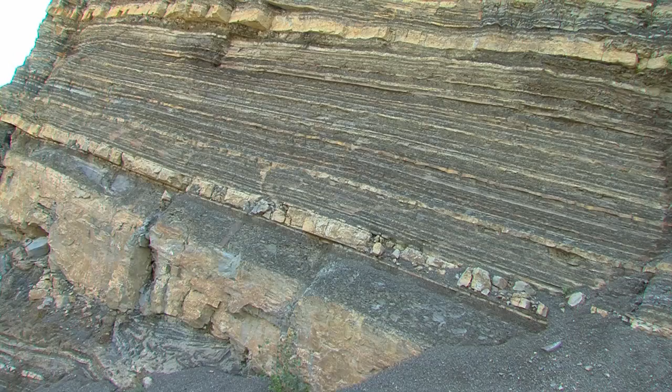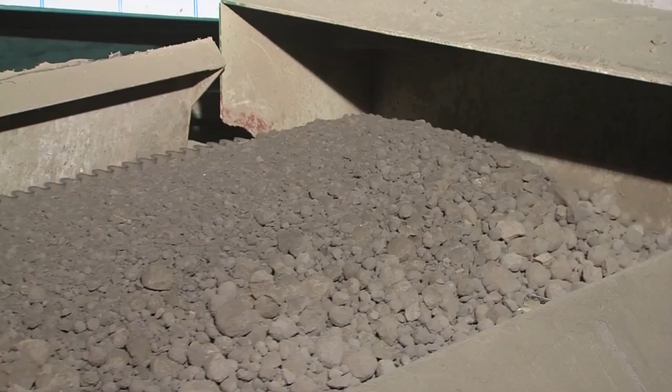Minerals are building our planet and are part of our lives. They have an important role in many industries, also in the production of cement, which is represented by the company Salonit Anhovo. We meet the minerals all the way from exploitation of raw material to cement and at the end to concrete. Let's explore minerals in the cement industry.

The cement plant Salonit Anhovo and its quarry are located in the central part of Soča Valley, in the municipality of Kanal ob Soči between settlements Deskle and Kanal. The whole mighty complex extends on both sides of River Soča. Fabrika, as it is called by the locals, for almost 100 years gives bread to the local residents and others in its near and farther surroundings.

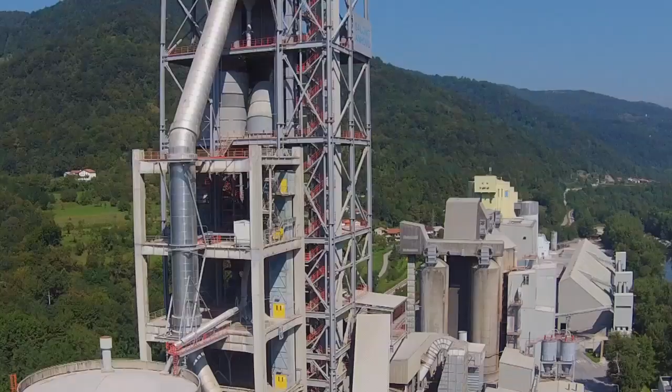The geographic location of the quarry, from where the main raw materials for cement production are supplied, certainly contributed to placing the cement plant right into this place. The area of Anhovo quarries consists of Rodeš, Perung, Lastiunica and Deskle quarries. In geological sense, they belong to the External Dinarides, and geographically to the western border of Trnovo forest.

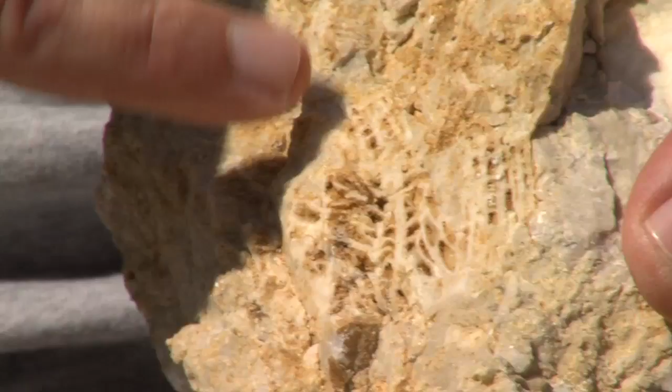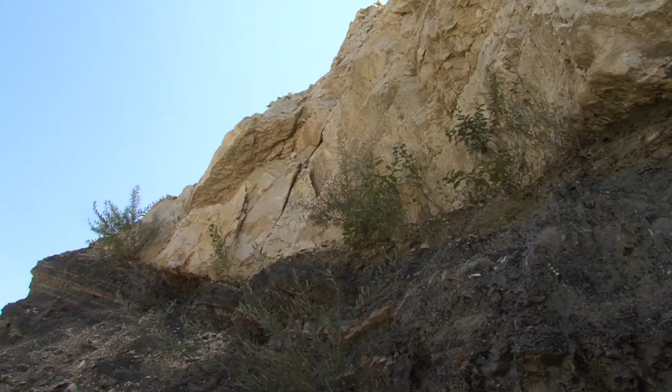Based on the geological research results, we can claim that the area of today's central Soča Valley was under the sea in the Upper Cretaceous, Paleocene and Lower Eocene. Tectonic movements and sedimentological conditions caused the occurrence of underwater landslides, known as turbidites, and debris flows. Seabed sediments, which were not yet completely petrified, have been eroded. After, slipping layers deposited in accordance with the gravity law, first larger, then medium, and finally the finest particles.

Thus were formed the cyclothems, which represent a sequence of rocks and were created as a result of underwater gravity processes. Layers which were deposited within cyclothems in the area of Anhovo quarries have quite similar composition. They differ only in the share of individual rock layers. Each cyclothem consists of marly calcareous breccias, coarse-grained carbonate sandstones, medium to fine-grained sandstones, marly limestones and marl stones.

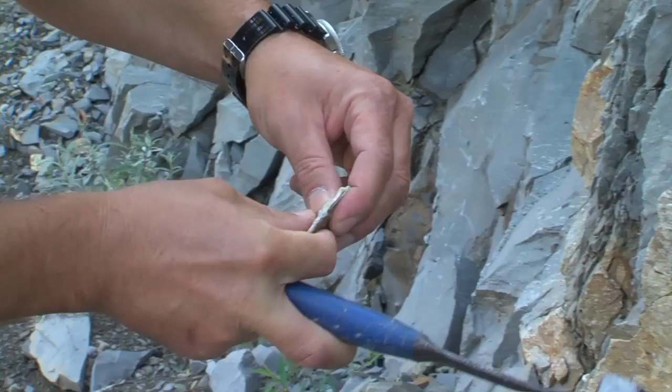The flysch sequences at the top of the marl stones consist of fine-grained carbonate sandstones which alternate with mudstones, claystones and siltstones.

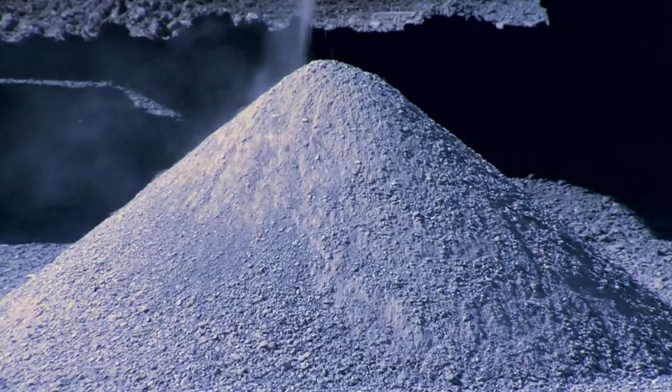The formation of the first Rodeš quarry is closely connected with the discovery of Ivan Nibrant, the master mason from Anhovo. In 1904, while he was cooking lime, he noticed an unknown grey powder, which later turned out to be an excellent raw material for clinker burning. Based on Nibrant's discovery, Emil Stock, the entrepreneur from Trieste, built in 1921 the cement plant in Anhovo. With the beginning of operation, the use of raw materials from Rodeš quarry, which is located on the left bank of Soča River, was also started.

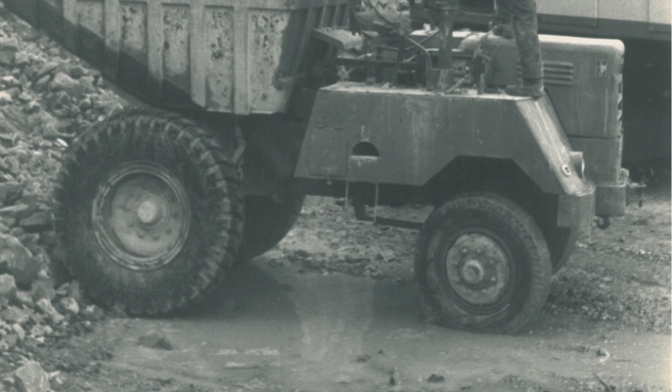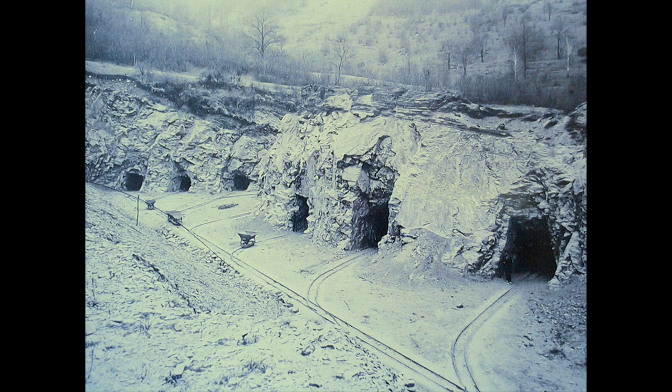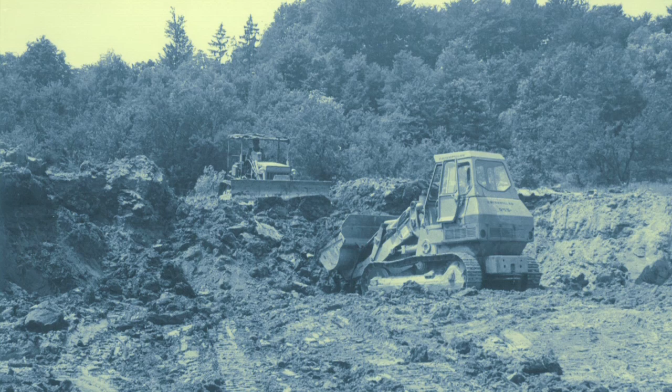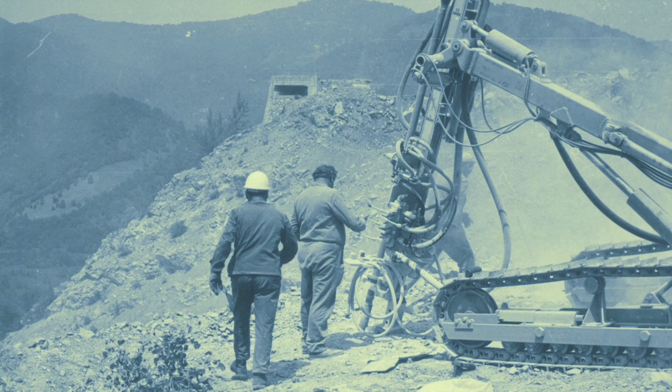Initially, they were extracting only marl stone, which contains about 77% of calcium carbonate. Its chemical composition was optimal for the cement clinker production. At the beginning, the natural marl, as it was called, was obtained through open-cast mining. Gradually, when the layers of marl stone on the surface were exhausted, the mining operations were redirected to underground extraction of raw material. The difficult working conditions and higher costs of underground extraction have stimulated the research work and the search for new layers of marl stone on the surface. This research led to the opening of new quarries, Deskle and Lastiunica.

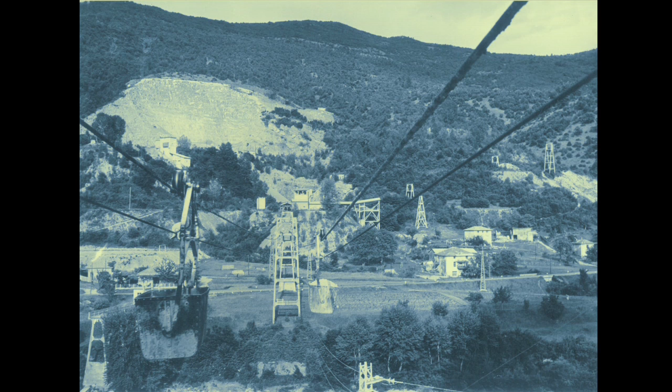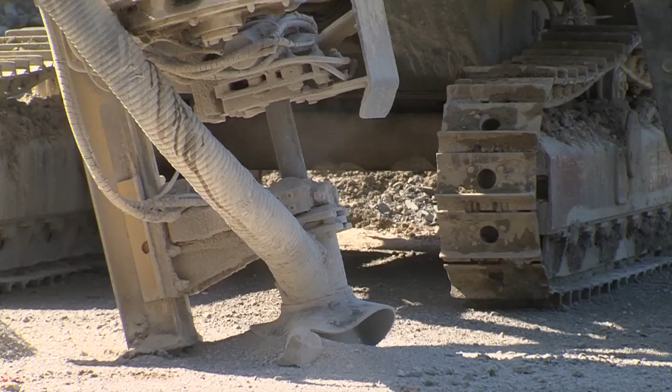The acquired raw material was in the quarry transported manually with transport carts or locomotive. The transportation processes continued with a cableway until the year 1973, which was held above the Soča River to the other part, where the cement plant was operating. Later, when quantities of natural marl were no longer sufficient for the cement production needs, the extraction, in order to get the right composition, was redirected to rocks with different contents of calcium carbonate, approximately from 70 to 80%, which were properly mixed before the clinker burning. Today, the mineral extraction runs through drilling and mining works in Rodeš and Perung quarries.

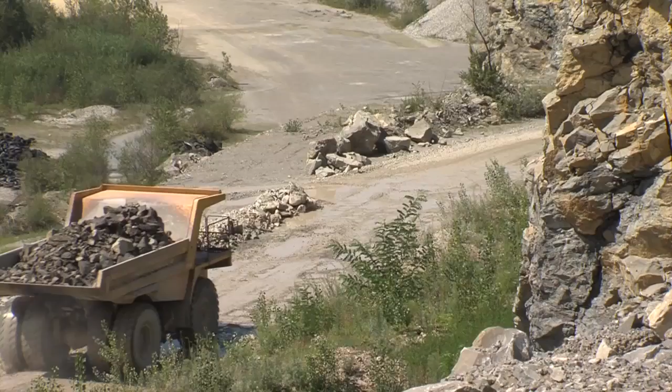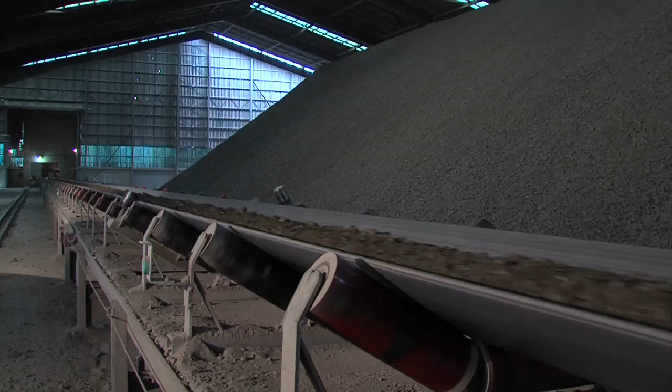From these quarries, the material is transported with dumpers, which have a load capacity of 50 tons, to the primary crusher. Crushed material is then transported with conveyor belts into the pre-homogenization hall. The pre-homogenization process is carried out with a longitudinal layering of the raw material mixture on a pile of 100 meters length, which consists of approximately 600 layers of materials with different compositions.

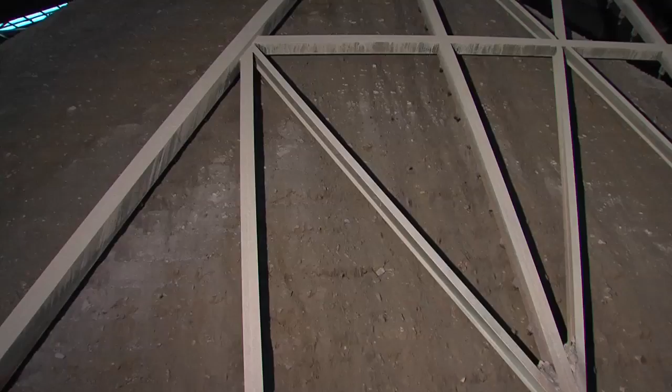Prepared material is taken from a pile with transverse withdrawing, which is carried out transverse to the pile's longest axis, in order to ensure the homogeneity of the raw material mixture. There are always two piles in the raw material hall. One is in preparation, and another is in use.

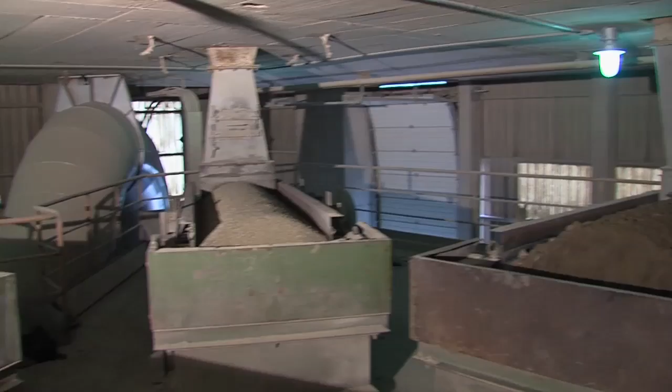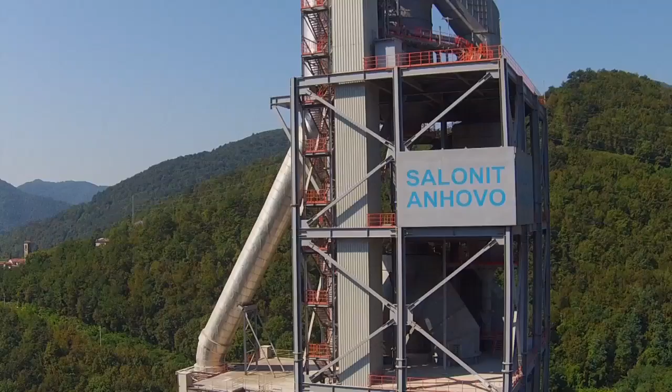Raw material mixture is transported to the other bank of the river Soča to the raw mills, where it is ground together with additives into raw meal. The latter is stored in silos, where the last phase of homogenization is carried out. Raw meal enters the clinker burning process at the top of the heat exchanger. Then it goes through a series of 5 cyclones and a calciner, where drying, preheating, and decarbonization, thermal decomposition of carbonate

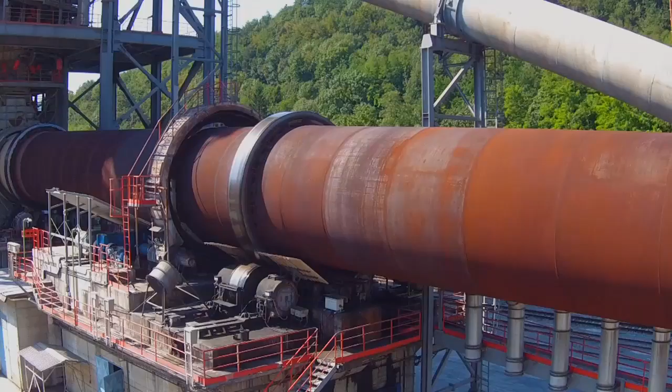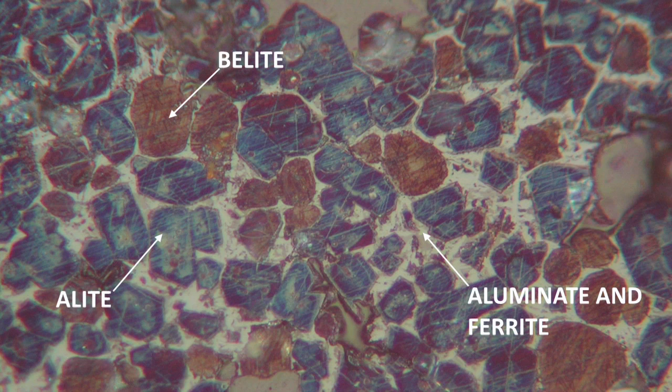minerals are taking place. Hot meal with a temperature of about 900 degrees Celsius enters the kiln in the cooler part. From there it travels toward the warmer part, where it reaches a maximum temperature of 1450 degrees Celsius. During burning, the material is partially melted. This causes complex chemical reactions that lead to the formation of clinker minerals: alite, belite, aluminate, and ferrite. In the final phase, the clinker is quickly cooled in a clinker cooler.

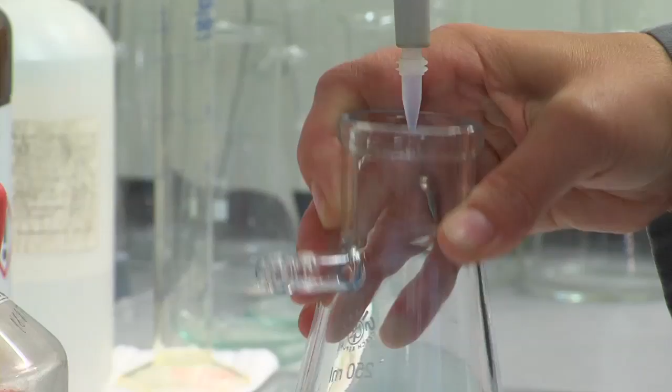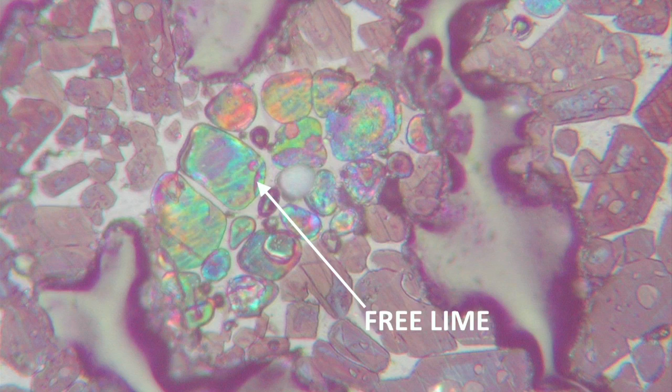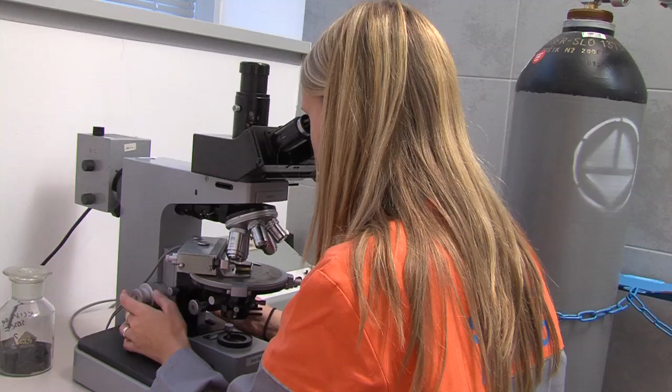The content of free lime, which has to be monitored regularly, is one of the criteria for determining the quality of clinker. Clinker minerals are clearly visible with observation under an optical microscope. The most important clinker mineral, alite, can be identified under the microscope by its blue color and sharp edges. It is very reactive and provides high initial and final strength in hardened cement binder.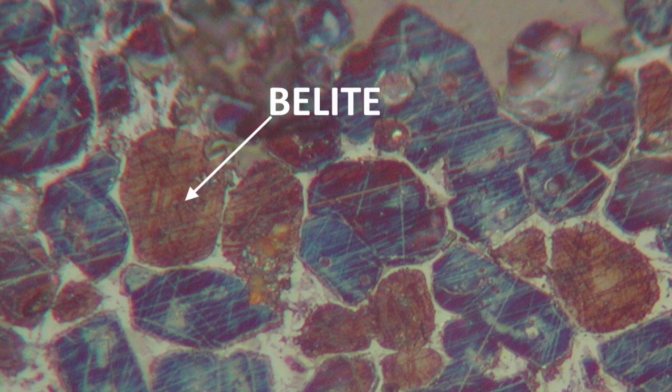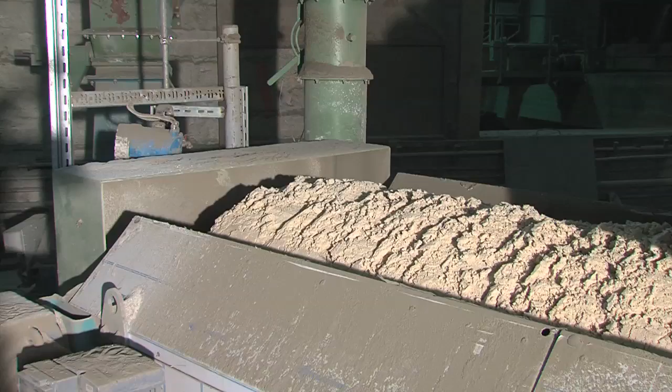The second most important mineral, belite, can be identified by its brown coloration and oval rounded forms. The space between alite and belite is filled with aluminates and ferrites that are formed during the cooling of the melt. Clinker with added setting regulator, gypsum, and various mineral additives such as blast furnace slag, fly ash, limestone or silica fume is ground into a grey powder, cement.

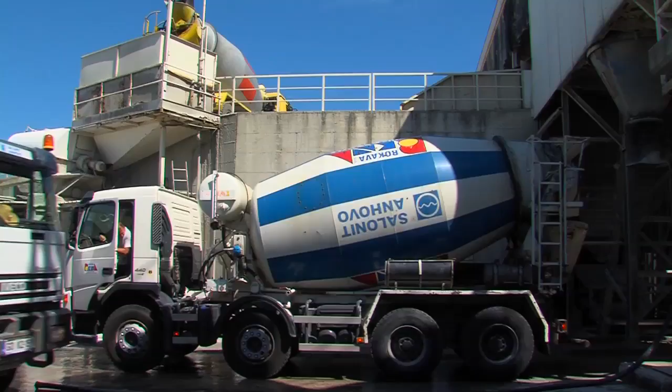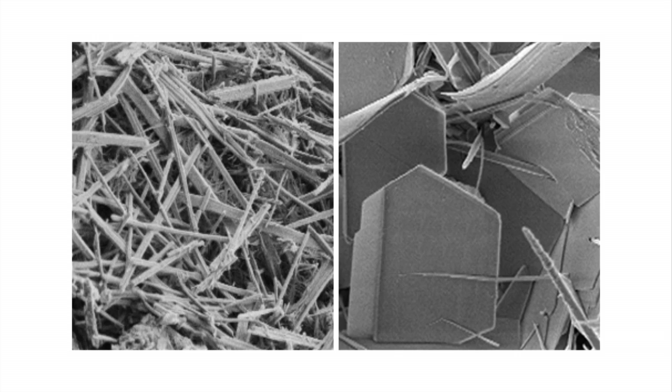A mixture of cement, water and suitable aggregate is concrete, which is the most widely used building material nowadays. Its binding component is hydrated cement binder or cement stone. This occurs in the process of hydration, when cement is mixed with water and clinker minerals react with it. Formed minerals can be observed only under the electron microscope because of their small size.

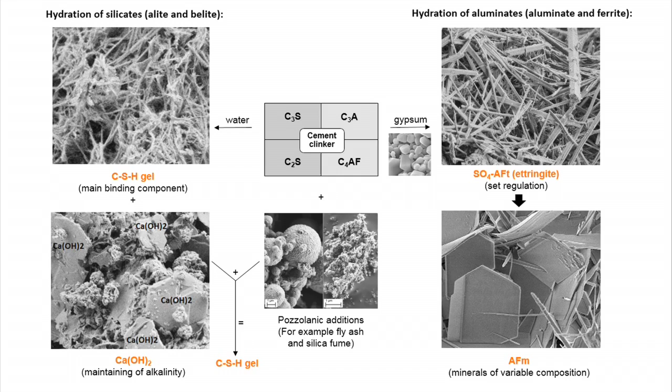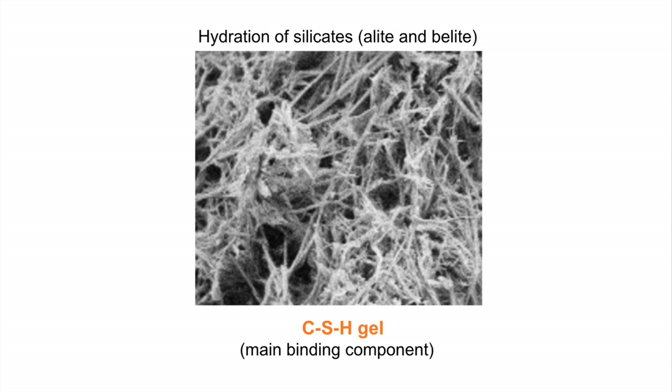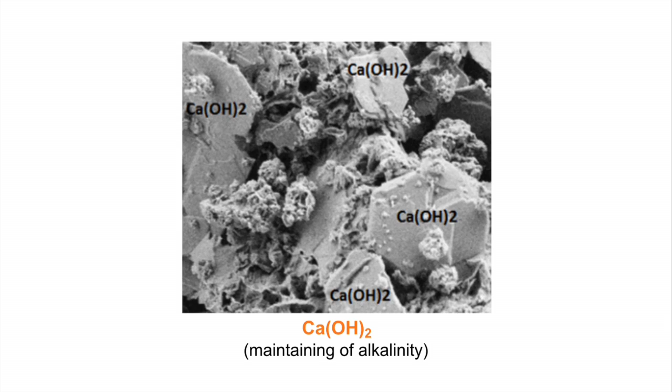In the hydration of silicate phases, alite and belite, CSH, calcium silicate hydrate gel, and calcium hydroxide are formed. CSH gel is the main component, which gives the binding properties to cement stone, and thus to concrete. Its morphology is unspecified. Calcium hydroxide appears as a crystal with characteristic morphology of hexagonal lamellae.

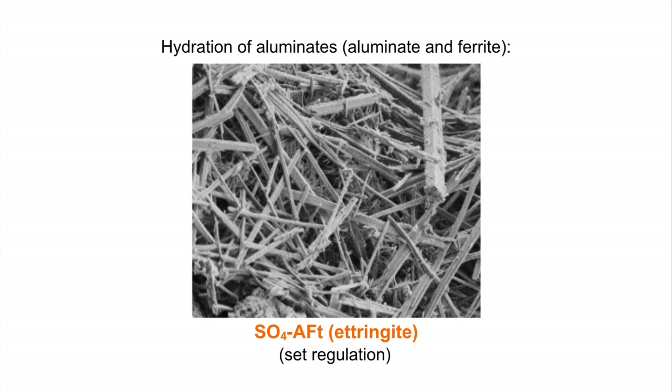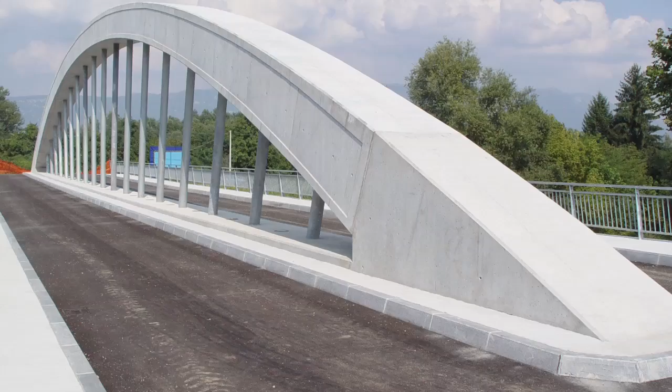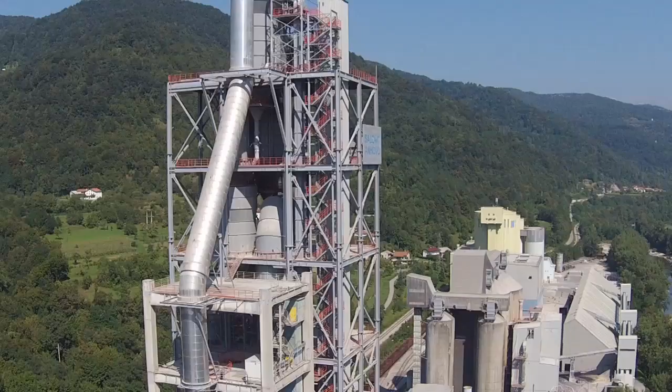In the hydration of aluminate phases, aluminate and ferrite, so-called AFt and AFm minerals are obtained. AFt minerals are characterized by a needle-like structure, while the AFm minerals are characterized by a layered structure in the form of hexagonal lamellae. In cement binder, in addition to reactions of clinker minerals, reactions with mineral additives also occur. Minerals in concrete are crucial for the achievement of the most important properties of concrete in use. Minerals are also important in our daily lives and can tell us a lot about our past.